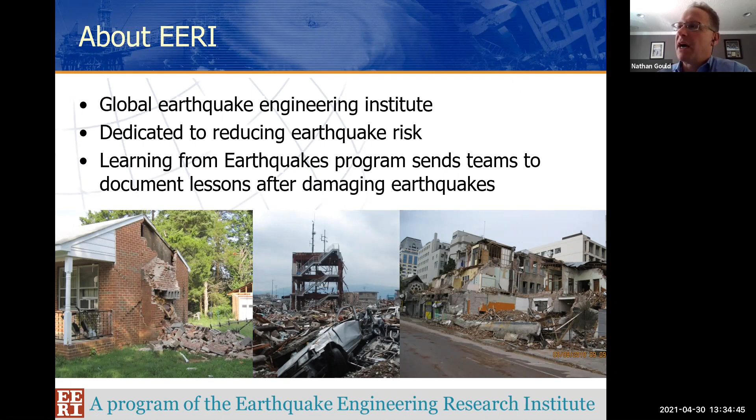So I'm going to talk about a bunch of different things, but the first part is, of course, you get to hear a little bit about EERI. Most of you obviously know a lot about EERI, so I'm not going to spend a ton of time explaining what it does, but I will tell you why I really enjoy EERI. You can see some of these things: the Freeman Family Visiting Professional, the competitions, the travel grants, Learning from Earthquakes is an excellent program. And then, of course, they give you this membership deal. So when you are a student, basically you get the first year of young professional membership free, and then you get the next 4 years reduced.

So all really wonderful. What I really like about EERI is that, coming from a structural background, it gives me the opportunity to engage and to learn from engineers that do other things than what I do. So I belong to a lot of structural organizations, SEI and some of these other organizations. So you hear other structural people talking all the time, or if you're at geotech, you hear other geotechs speaking all the time. But what's great about EERI is that it's this group of individuals with mixed backgrounds. So not only geotech and structural, but then you have the social scientists as well, which is tremendous.

And I've actually learned a ton from some of the social scientists that I've worked with and been around, even on the reconnaissance. So that's what I really, really like about this organization. It's really a one-of-a-kind organization, extremely worthwhile, and it's excellent for advancing your career as you move forward, especially if you're really focused on earthquake engineering.

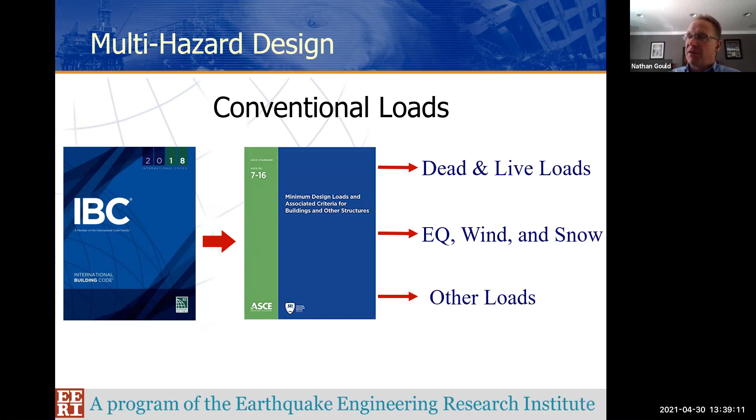And from this, we can get our conventional loads: dead and live, earthquake and wind, and some other loads. So most practicing structural engineers understand this. They have this down, hopefully. What about our unconventional loads? Like it's mentioned, we're being asked to design for these, or at least offer an opinion as to what the potential hazard is and what the implication is to the structure or to the facility. And so where do we go to find this type of information?

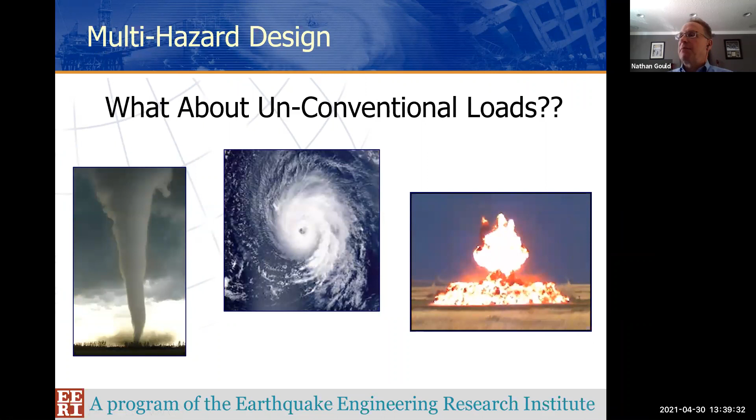So first, let's just talk about extreme wind. Extreme winds become more and more of an issue, not only in hurricanes. We see more hurricanes that make landfall with greater strength, but we also see a lot more tornadoes. Approximately 10 years ago, we had some really horrible tornadoes in the Midwest, through Missouri, Alabama, and some other locations that caused significant loss of life.

So there are these guidelines for extreme wind. One of them is the ICC 500 document, which is an excellent document. And that's nice because it's an ICC document, so it's the same family of documents as the building code, basically. The ICC produces the International Building Code. So there is that continuity.

FEMA has a great document, FEMA P-361, that offers a lot of excellent advice, resources, and guidance on the design of safe rooms for tornadoes and hurricanes. It's not strictly for safe rooms. A lot of the information could be applied elsewhere, but it is interesting to note how the requirements for safe rooms are making their way into the code for certain structures. Some of you may have seen that for schools.

So tornadoes, I know they're not so prevalent on the West Coast, but a large swath of the US is exposed, and we use what we call the Enhanced Fujita scale. A lot of people still refer to it as the Fujita scale, but it's been quite a few years since the National Weather Service changed it and made the Enhanced Fujita scale. And you can see the types of damage.

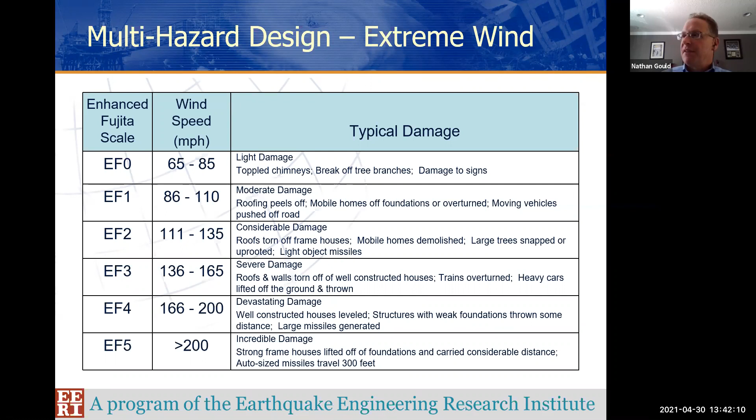On the hurricane side, this is mostly the East Coast and the Gulf region, hopefully people have seen the Saffir-Simpson scale. It's been around for quite a while. Again, it's different than the tornadic scale in many respects, but one thing is that we know the hurricane's coming, right? We can see it. The National Weather Service gets out there in their airplanes, and so they can measure the wind speed.

So the wind speed is a fairly accurate measurement. The storm surge that's associated with them, I won't say it's not accurate, but I would take it with a grain of salt, plus or minus, if you will. So these are the things to understand, Saffir-Simpson, the EF scale. Just as clients ask about designing for extreme wind, in addition to perhaps seismic or other hazards, these are types of things that you have to have in mind.

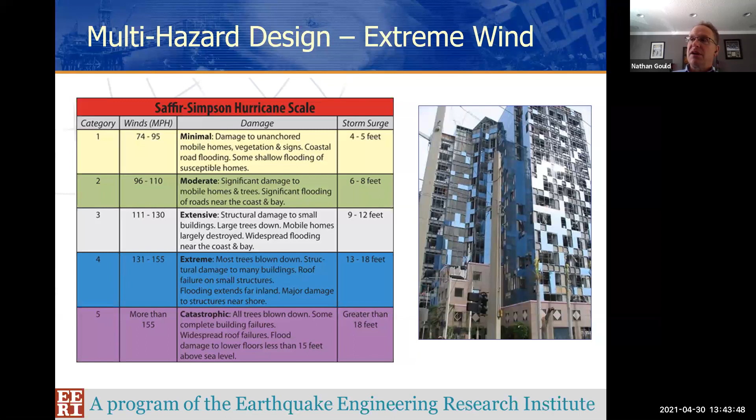I know when I started out in the West Coast practicing, it really wasn't something on my mind, but now people tend to practice all over the United States or all over the world, in fact. So it's something to be aware of and to understand how to apply it.

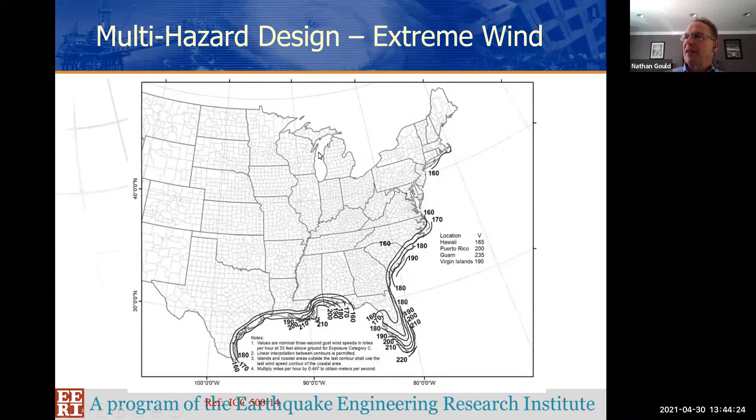Typically, these are tested items, what we test for both a vertical and horizontal surface. So it's kind of an interesting idea. So this is a 15-pound piece of 2x4. Typically, it's a facade. It could be including the window and the remaining facade of the structure. We would want the facade to basically be able to withstand this type of projectile.

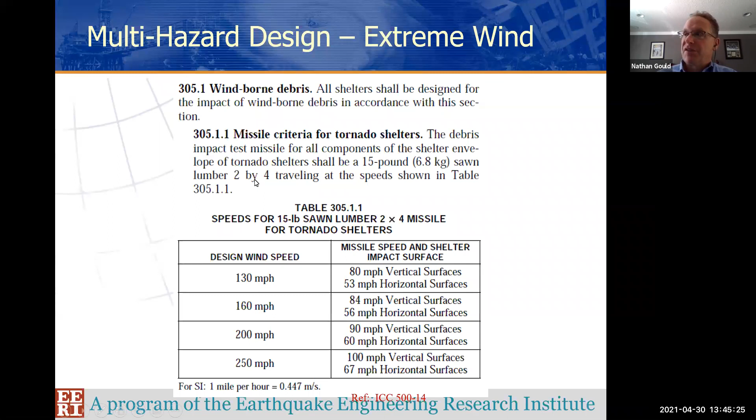So to give you an idea of what that might look like, I'm not going to play all this, but I don't know if you've ever seen these tests. They're pretty cool. I know some researchers that do this. They really love these little cannons. So it's a 15-pound 2x4.

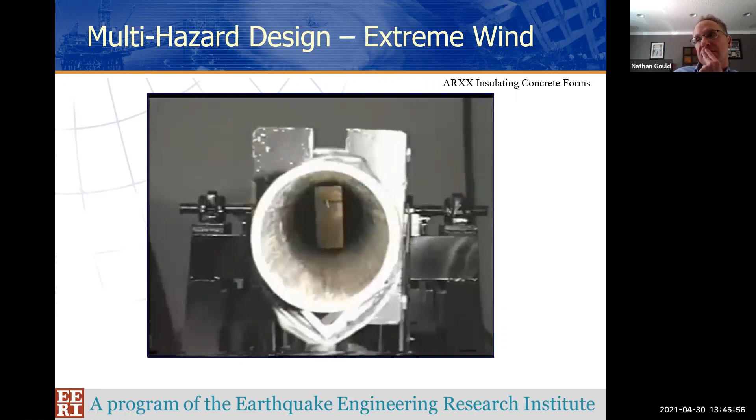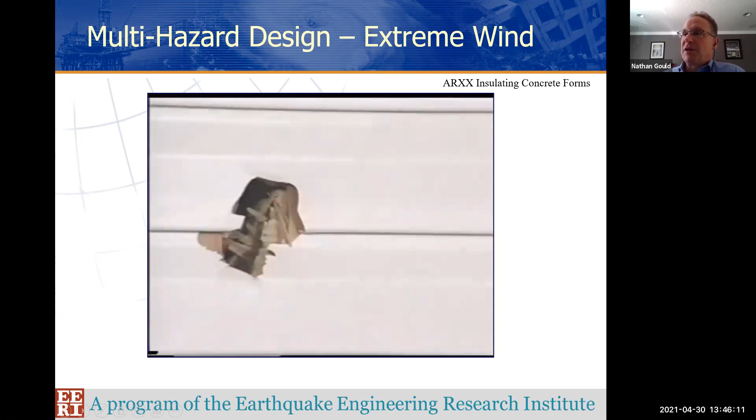So we'll see here, the first one is wood. Okay, so it's wood and siding, not a huge surprise, but what I find interesting is this test, right? So this is a brick facade. So this is somebody's home or somebody's business or somebody's office, basically a brick facade being impacted by a 2x4 traveling at speed. So interesting idea.

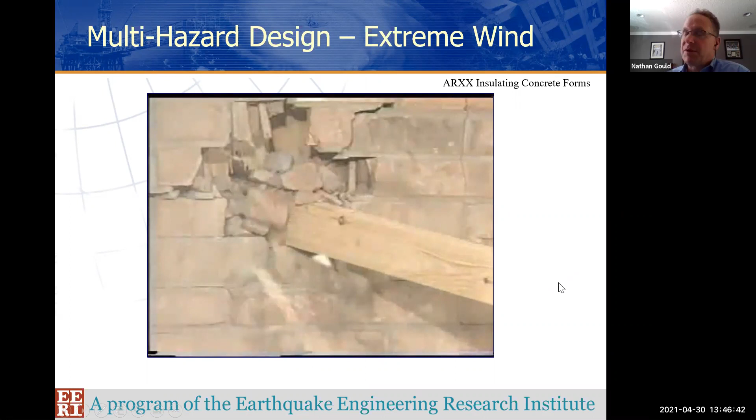It's something that I had never really given a lot of thought to when I first started doing extreme wind design, but when you have to design for that, finding a facade that will meet that requirement can be challenging.

Okay, so a couple of the other hazards. Blast, again, there's what we would typically call the terrorism type risk. But a lot of it is also petrochem, it's industrial. So every year when you see the news, there's several explosions every year. And it's been going on for a while. It's actually been getting better. There's a lot of government agencies that have been focused on trying to reduce and to learn from past experiences. But it's something that we still worry about, and in often cases we design for.

So in anti-terrorism force protection or blast design, the very first thing we focus on is standoff. So for those of you that maybe have looked at some of the dynamics, you know that the pressure and impulse produced by a blast is a function of the distance to the third. So we always say distance is our friend. So the more distance we can get, the more standoff we can get, the better or the safer we feel.

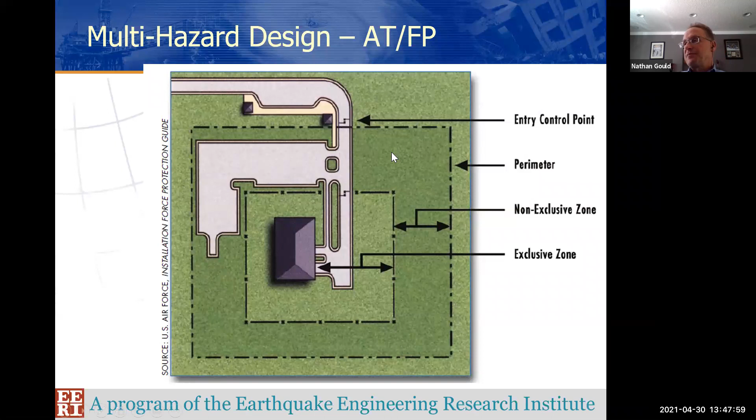If you are asked to do some blast work, or at least to integrate blast into your design, there's a couple of publications that are basically standards, or in the GSA's case, it's more of a guidance document for GSA. ASCE has a great blast standard, blast protection of buildings. And then the GSA, again, is progressive collapse. The DoD has a similar type progressive collapse guidance as well. So this is the Unified Facilities Criteria.

So for those of you not familiar, a lot of the information that's generated here in the US that focuses on ATFP and blast comes out of the defense industry. And the Unified Facilities Criteria is a great resource, and it is open, so it's public knowledge. Most of it is. There's some that is kept a little bit more tightly held, but it's an excellent resource. And then the book on the right, I would highly recommend.

In fact, for our staff, if we have a design and they have never been exposed to blast design, it's probably one of the first publications that I give to them, in that it really is an easy to use, easy to understand primer, if you will, on blast resistant design. So even though it says petrochem facilities, it would apply to other types of threats as well. So it's an excellent primer for those of you that may be looking at that type of work, or sometime in the future may be asked to work on a project that has that type of design.

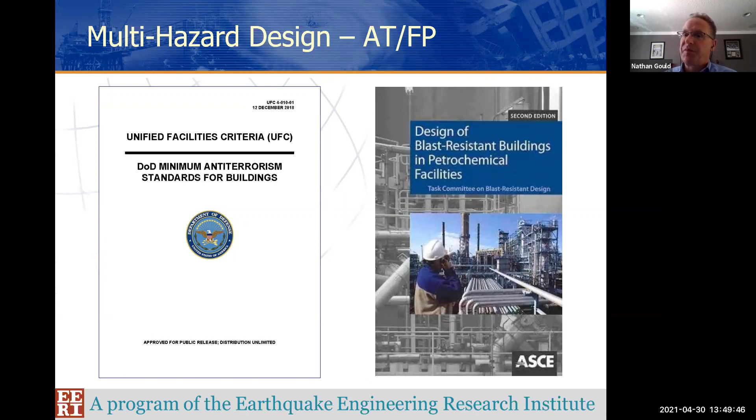So what is a blast? I found out earlier that most of you, if not all, are graduate students, so most have probably had dynamics, so this should look real familiar. Basically, it's this pressure disturbance caused by sudden release of energy. And again, people tend to talk about high explosives because that's what's in the news, or that's what's on people's minds. But we see a lot of these vapor cloud explosion or pressure vessel burst type of scenarios, especially in the industrial and the petrochem.

And so, with the blast, of course, we get this very, very quick duration, in milliseconds, right? And typically we have a positive phase and then we have a negative phase, which is different than most types of loads that we have. So even earthquake, which is a dynamic load, is so different in that the blast happens so quickly that the load is over and then the structure is responding. And so it's a different arena, and it takes a little bit getting used to.

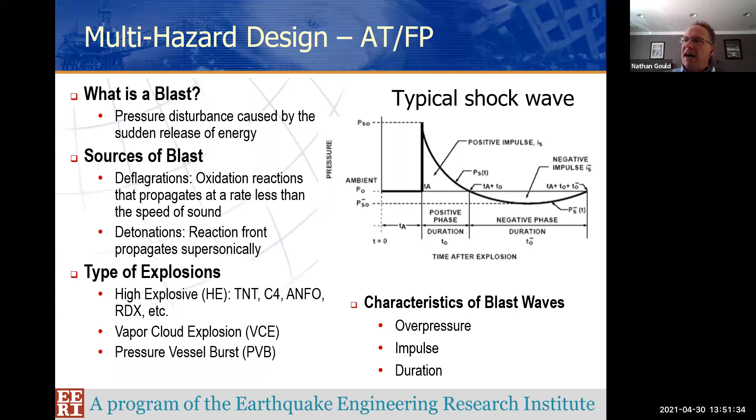And what you'll find, if you do get into that work, is that explaining that even to other structural engineers, and being able to integrate that into a design, can be really challenging, because sometimes the language is quite different. So for instance, if you have 5 PSI of blast load, some people just want to multiply that by 144 and apply that to the building as basically a static load, which is way overkill and would result in a tremendously over-designed structure. So things like that are one of the issues that you'll face.

So it used to be, in order to understand blast, get the characteristics, and do design and verification, we had to do a lot of free field testing, which is expensive, can be dangerous, and there's other issues with that. Now we also have another approach. We have this element on the bottom that I'll talk about in just a second. So we see some of the single degree of freedom. That's our classic go-to standby SDOF system. We use a lot of multi-degree of freedom software and systems as well. And there's some very high-tech computational fluid dynamics programs now that are just excellent, as well as the finite element. Typically, this is FEA on the right.

The bottom left, that's what we call a shock tube. And that's kind of a newer type of test facility, if you will. It's been around for a while. This one is actually something that we own. What this does is basically allows you to put a window or a door or some other type of element here at the wide end. You pressurize it and then you break a diaphragm, and as the pressure is released, it will impact your element with a pressure that's somewhat similar to an actual blast pressure, but there's no explosive.

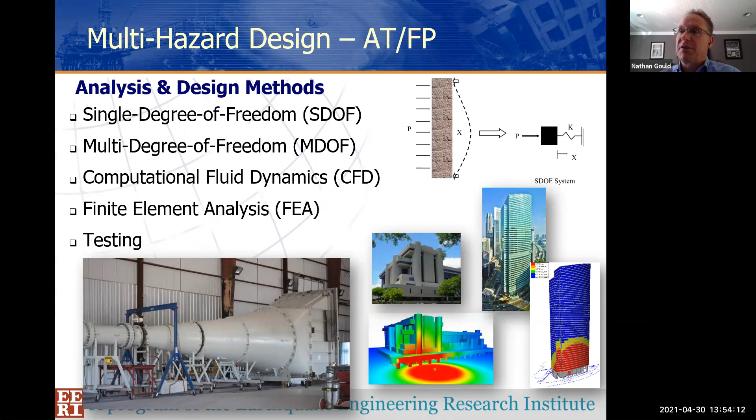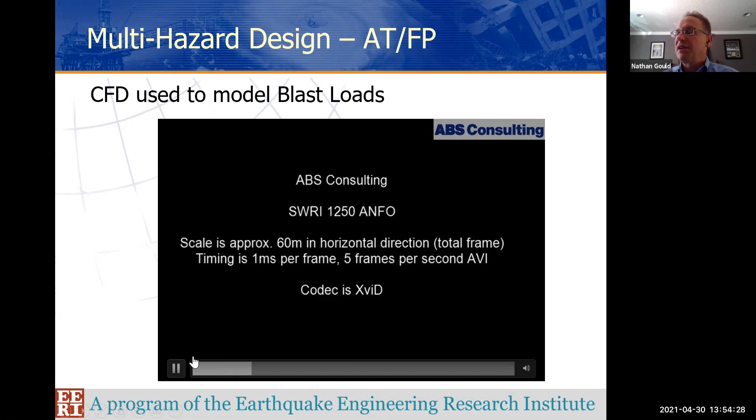You know, you're never quite guaranteed of what you're going to get. There was a lot of discussion about CFD when it first came out, how well it would simulate the blast loading. And so this is just a comparison of the CFD and the blast loading. What we can see is that on the left is the actual loading, and on the right is a CFD model. And so we can approximate the blast loading pretty well using CFD. So it's a nice thought. It's nice to have, because it's really helpful to have that alternative from an analysis standpoint.

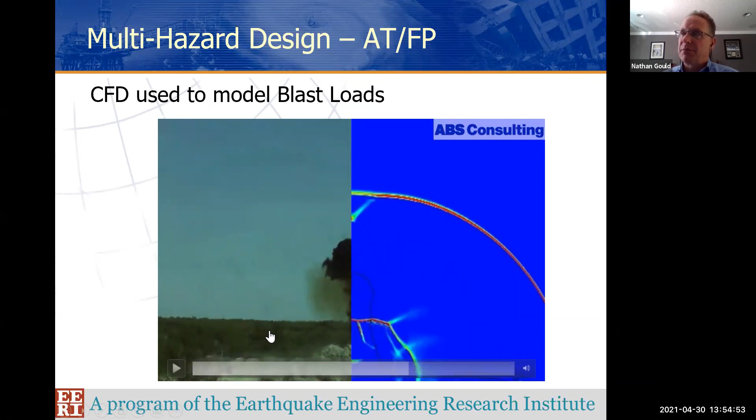So progressive collapse, it was not born, but it became hugely important to the US and to others really after Oklahoma City. For those of you maybe a little bit younger, this was back in April of '95. Most of the people were actually injured due to the flying glass and debris. But one of the things that came out of this tragedy was the recognition that some buildings are prone to progressive collapse, where basically you have an element or elements that when they're removed, like a transfer girder, for instance, that causes disproportionate collapse throughout the structure. And this became widely recognized and understood as being an issue. And so now certain buildings for certain clients are designed specifically to resist progressive collapse.

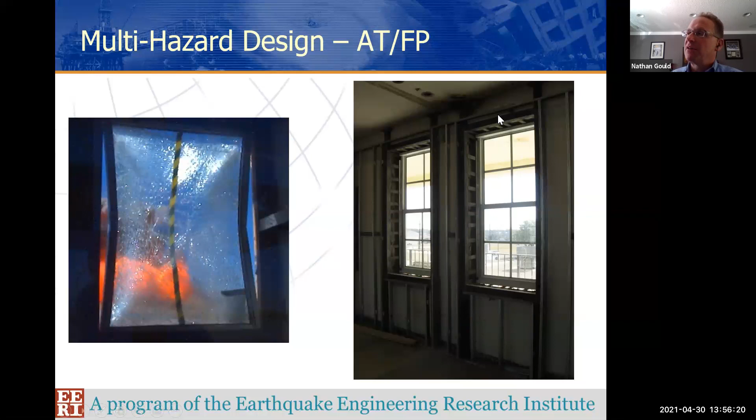As I mentioned, one of the biggest hazards coming out of that tragedy was flying glass and the debris produced by the flying glass. On the left, we see a witness panel or a test panel. On the right, you can see some glass that's been strengthened, where not only the glazing and the frame are strengthened to resist the blast loads, but then those loads have to go somewhere. So you wind up with very stout jambs and sills and heads around the window.

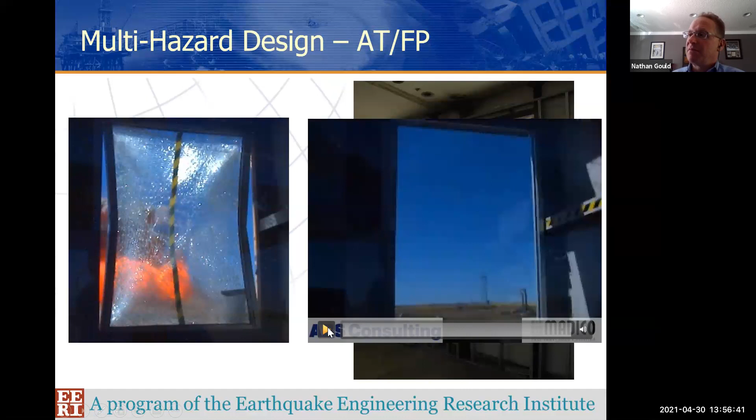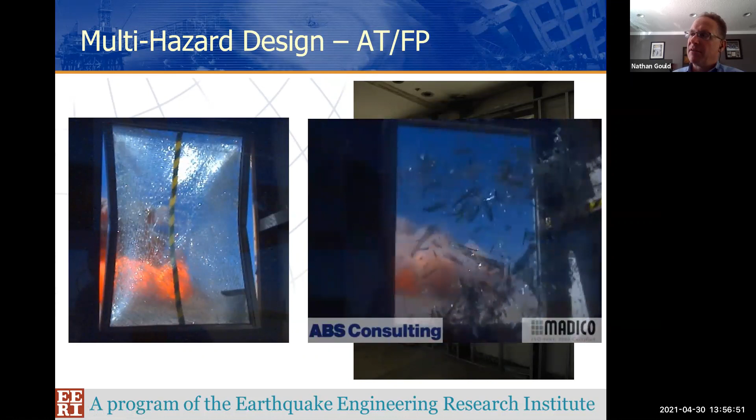So just to give you an idea of what this looks like from a test standpoint. If you are inside the structure and the blast is outside, you'll basically see what happens. First, this is a pane of glass that is not laminated or strengthened against blast loads. So here comes the wave, and you can see all the shards. That's one of the issues that we're highly concerned about when we start designing in this environment.

Okay, so that was a quick tour of the other loads, the multi-hazard and the blast, the wind. But of course, this is EERI, so we're all about seismic. So I wanted to talk a little bit about the seismic and how we integrate that in. For seismic, of course, we have the new buildings with the IBC, then referencing ASCE 7, and of course performance-based design, ASCE 41, extremely popular in certain circles. And I have that little arrow because there's always this discussion about if you design a new building per code and then you check it per ASCE 41, will it check out? There's been a lot of discussion about that. I find that interesting, if not amusing sometimes, but I think that could be an entirely separate topic.

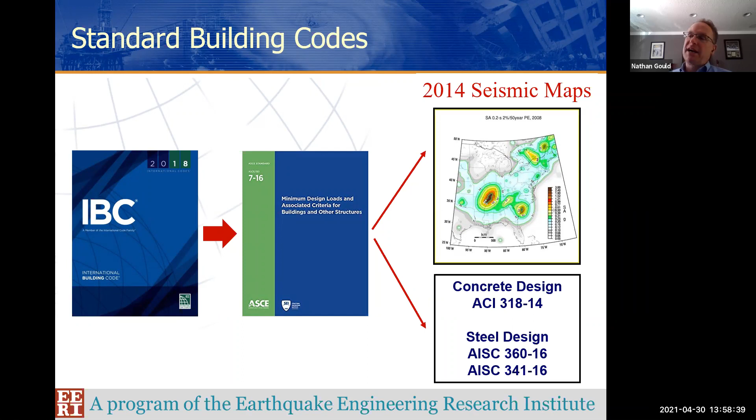So again, standard codes, most of us are familiar with those. We have the IBC and then it references ASCE 7-16. From that, we're told where to go find our seismic maps, the seismicity, and then the materials, the different disciplines are also referenced. So there's a lot of referencing going on. For students especially, and even our younger engineers, it can get confusing which code to use and what is the correct reference. Sometimes you do run across instances where people are using seismic maps that are either too old or too current, if you will, that are not correct based on which ASCE 7 is being referenced. So we do need to be careful with that.

So again, building codes, we think of these as a minimum set of design standards. I would say most practicing structural and other engineers understand this to some degree. A lot of other disciplines as part of the consulting team, probably not so much. So it's important that we be able to articulate this clearly and make sure that everybody understands what we're talking about. Again, it's about life safety, and we anticipate the structural and non-structural damage. As some of you have seen, this can be a foreign concept for some folks, and a lot of owners and even architects that you work with are not aware that this is something that can result from a well-designed code building.

So again, no financial consideration. So if the building is a complete economic loss after an earthquake, but everybody gets out safely, the structural engineer may be patting themselves on the back saying, hey, look, we designed per code. We did a great job. Everything performed well. We had all this plastic deformation, a lot of energy absorbed, but hey, everybody got out. We did a great job.

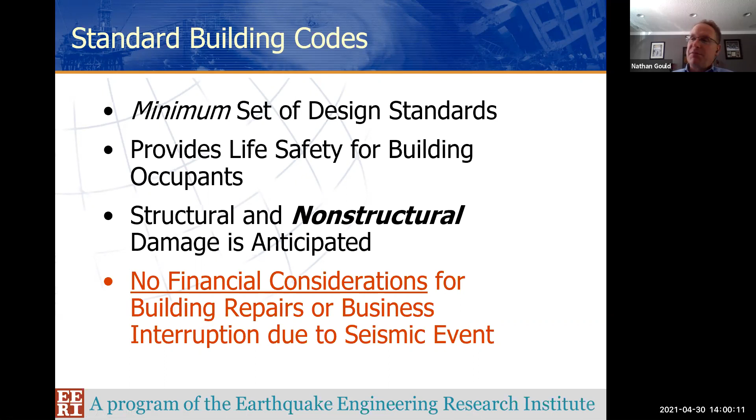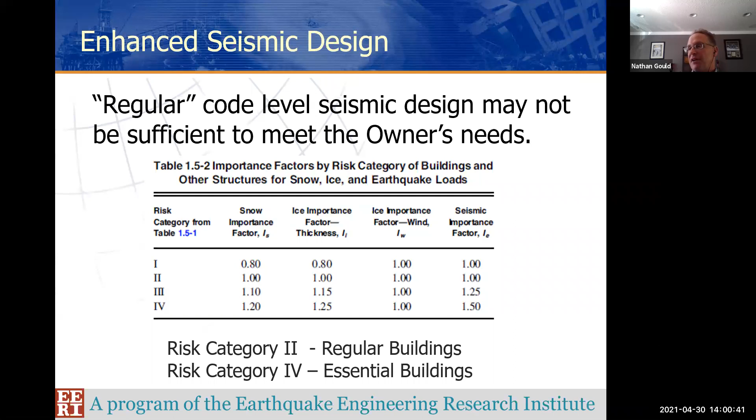And then the owner is saying, well, hey, but my building's a loss. So there is this issue. In the code, we can talk about doing a little bit better. This would be like an IBC ASCE 7. Of course, ASCE 41 is slightly different, but from a building code standpoint, we can bring this out and have a little chat about these importance factors. But typically this doesn't really come up unless you're actually looking at a hospital or a fire station, or perhaps a school or a large assembly facility.

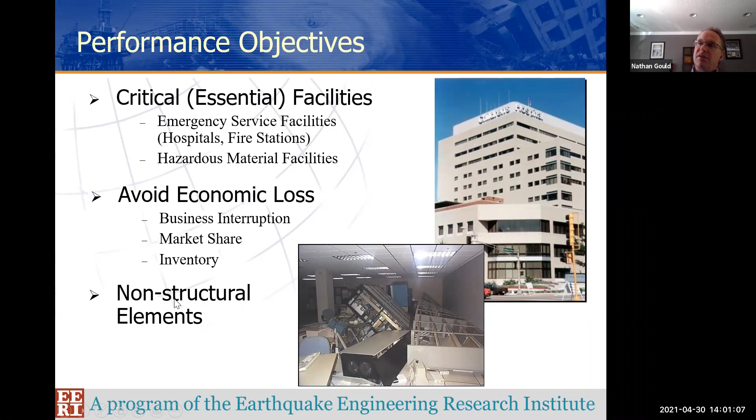So we have critical facilities. Most of us are aware of that. A huge hospital program in California, of course, and elsewhere. But outside the hospitals and maybe some other special structures, we don't tend to think of critical design. And again, how do we avoid economic loss? This is really important to many, many owners. And they may not articulate it well.

And sometimes you have to talk to the right part of the ownership. So for instance, if you're doing a very large facility, you may be talking to their construction management folks or some type of contracting arm that they may have. And it's really the risk manager that is really focused on this business interruption and the market share. So all of that is key. But again, you have to talk to the right folks and have a clear message.

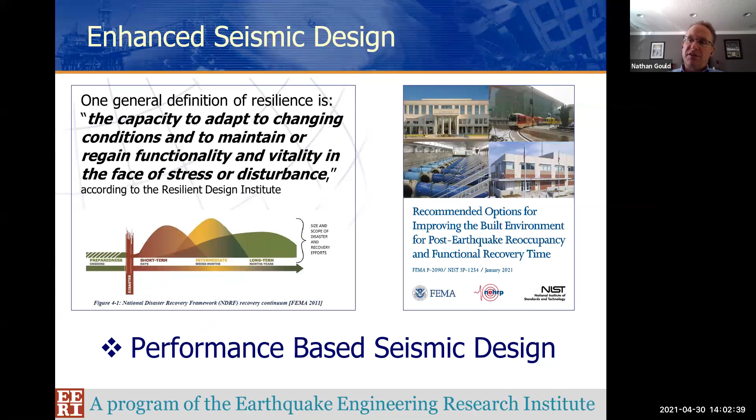And so I tend to think, and I think a lot of folks do, that earthquake engineers are typically the leaders in performance-based design. I didn't say seismic, I just said performance-based design. So when it comes down to designing structures to perform at a high level for other hazards, who better to get that message across and to guide the team than an engineer that really understands the history, that history being performance-based seismic design.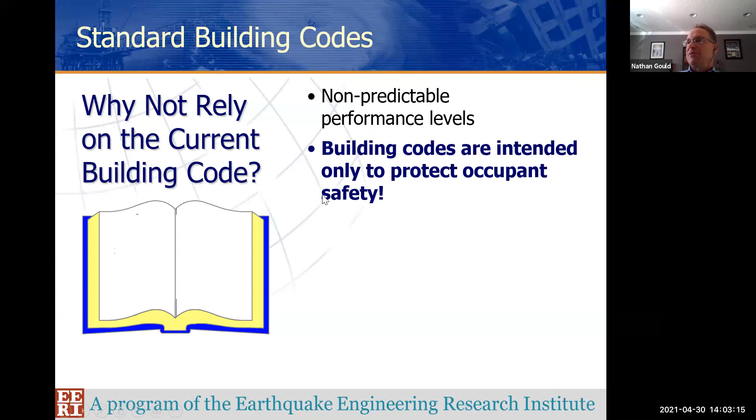So some older slides that have been around for a while, but I find helpful sometimes: why don't we rely on the code? We have this discussion quite often, not only internally, but a lot externally with our team and different owners. And sometimes it's a long discussion, and you have to respect the owner or the leader of the team; it's typically them footing the bill. So you can guide them to the idea and help them understand what it means and what it doesn't mean. But at the end of the day, it does become their choice.

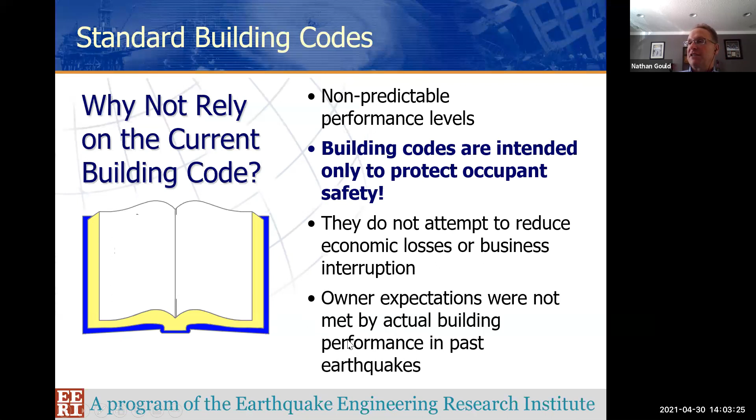And you want to focus on their expectations, right? And appeal to their economic issues, and basically help them focus on what things could be like after an event. So again, to protect their investment, we don't typically want to rely on the building code as the base design if we can avoid it, and make this a team effort.

So if it's just the seismic engineer pushing for this, it looks a little self-serving, right? Because this means that we're going to do more work probably. And B, it's typically going to fall on deaf ears because nobody else really wants to hear about it after the fact. So you have to get everybody together early. And I mean early, like when they're actually still thinking about how they're going to budget for this new project. Once the budget is set for a project and things are moving forward, it's almost too late, because then enhanced seismic or enhanced wind or whatever it may be becomes a burden to the project and to the ownership.

So currently, a lot of us are using ASCE 41-17. It is an excellent resource for seismic. We actually also use it for other hazards as well in certain fashions. One of the things we do is we use it to help delineate different performance levels relative to hazard or return periods, and talk about how to control the building performance, or at least understand building performance and the expectations.

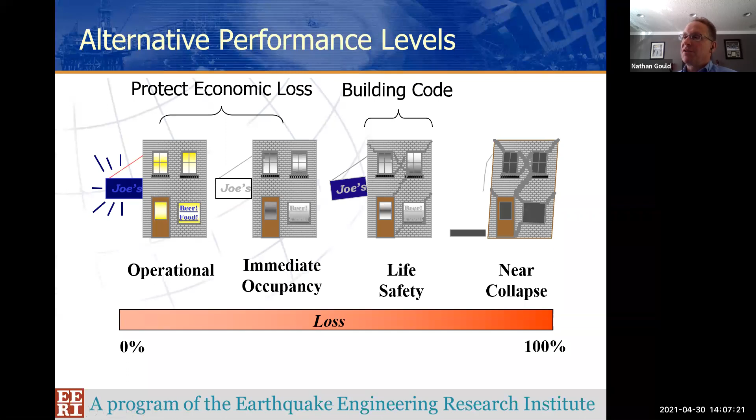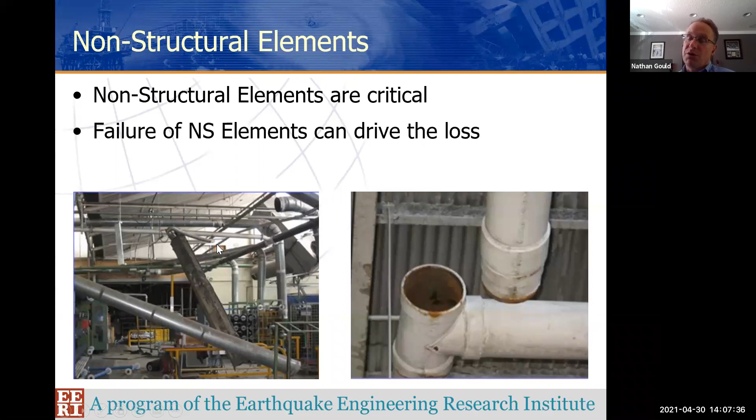Speaking of the non-structural, it's one of the issues that we see over and over again in different earthquakes that are critical, that often lead to a building not being functional after an earthquake or an extreme wind event. And it's one of those elements that are often forgotten about or not really focused on during a design.

So non-structural has become more of a known quantity, if you will, but a lot of times you'll get to ends of jobs and people will be looking to see who dropped the ball in terms of non-structural, not getting braced, not getting anchored, not getting laterally restrained. So one of the things that we try to do, as a structural or seismic team member, is to make sure the team understands that this is something that has to be taken care of.

So, is it a structural engineering issue? Is it a mechanical engineering issue, if it's ducting, or is it an electrical issue, if it's MCC units? So, when you're a team, you have to make sure the team takes care of it. And so that just needs to be something that's focused on during the design process.

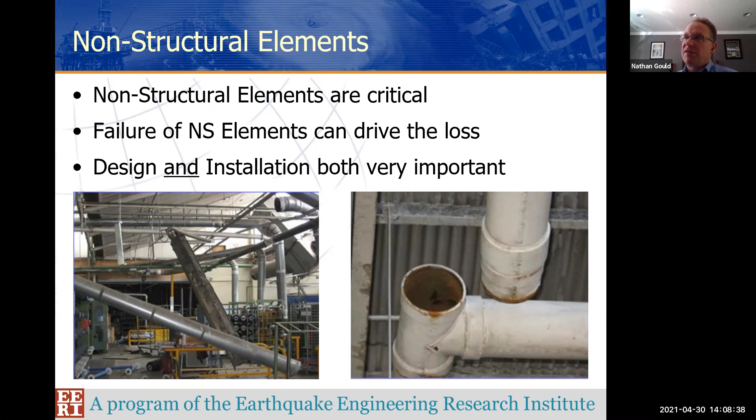So all is not lost, or all is not bad news. We have a lot of great advanced technologies, and I'm sure many of you have seen them. One of them that's really popular these days are these buckling restrained brace frames. There's several others as well.

So, I think the future is really bright as far as tools and options for using enhanced seismic, and installing these types of advanced technologies, not only in new structures, but in some cases, existing structures as well. So I think there's a lot of bright ideas out there, and a lot of good ideas. So I think there's a lot to look forward to.

We always get asked about cost. That's one thing that always comes up. So what does it cost to upgrade to better seismic performance? And it's really tough to pin it down because a lot of it depends on the overall project, right?

If it's a small project where the structural work is a significant piece of the whole project, then it may be more percentage-wise. If it's a huge project with all kinds of MEP and different types of equipment, mechanical, whatever, the structure could be relatively small from a cost perspective, and so the total cost could be pretty small. So we tend to focus in on these ranges.

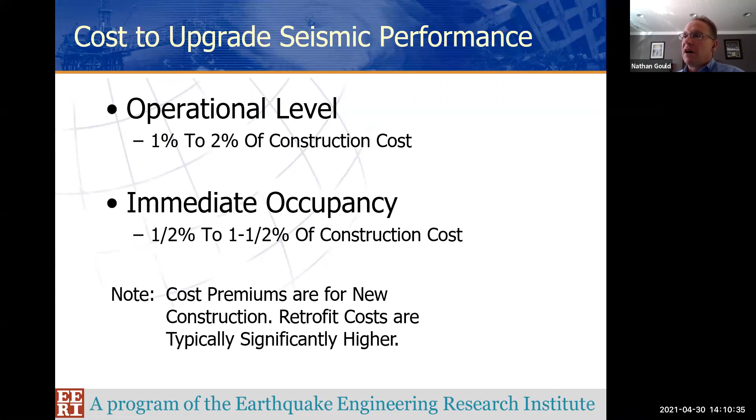But again, it really fluctuates. So you can see, these are very close. The difference being, again, is the lifelines and the non-structural. But this could be as high, I've seen it as high as 7 to 10%, for a smaller project where, again, it's a complicated structure, and the structure and then the bracing and the enhanced bracing or restraint of the equipment drove the cost up. So again, it's really a little bit all over the place.

Okay, so that was kind of a quick tour of some of the other hazards along with the seismic performance base. And the idea is to tie it together. So you have a bunch of different hazards. You have the potential at some sites to actually have multiple hazards at one time. So how do we pull it all together? The first thing we do is we keep the load cases separate. So we don't want to mix and match hazards.

It sounds really simple, but when people get busy, things get a little crazy. Things can get mixed up. So it's really important from a bookkeeping standpoint to really focus on the different loads, because there's different issues, different load factors, different phi factors, et cetera. So we have to keep everything nice and neat and nice and separate.

Be very clear about code versus ultimate design. So for instance, seismic, most wind, we're in a code design, whether it's ASCE 7 or 41. But when we go to the blast world, we might be in an ultimate design with no load factors and a phi of 1. So it's important to understand the type of design regime that we're working in and how to apply that.

And of course, owner education. That is a huge issue. Without the owner being educated and on board, things very rarely tend to go well. And same as the last bullet, this coordination with the disciplines. Whether it's this enhanced seismic or the other hazards, often some of the disciplines won't have been involved in that type of project before. So this could be totally new to them.

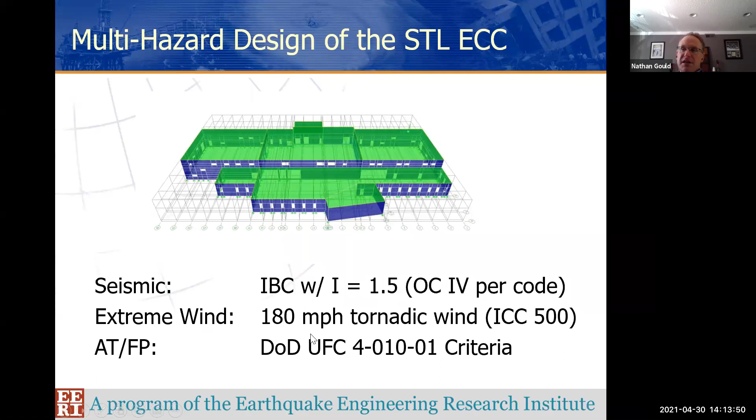So the extreme wind was interesting because almost 10 years ago exactly, there was a pretty large tornado that came through the area, damaged the airport, and actually damaged a lot of the structures and facilities near where this new 911 center was going. So they had asked, in light of that, as the design was progressing, how could they integrate tornado?

And we started having a conversation, and you say to them, well, how big do you want? And they say, well, how big does it come? What's the biggest? And you say, well, there's this EF5, which is like the Kansas Dorothy thing. And they're like, oh, that's great. And you're like, no, that's not so great, because it's hard when you get to the very extreme levels to find products and design elements that will actually work, from warranty issues and other things. So we actually settled on that 180 mile an hour as kind of a compromise.

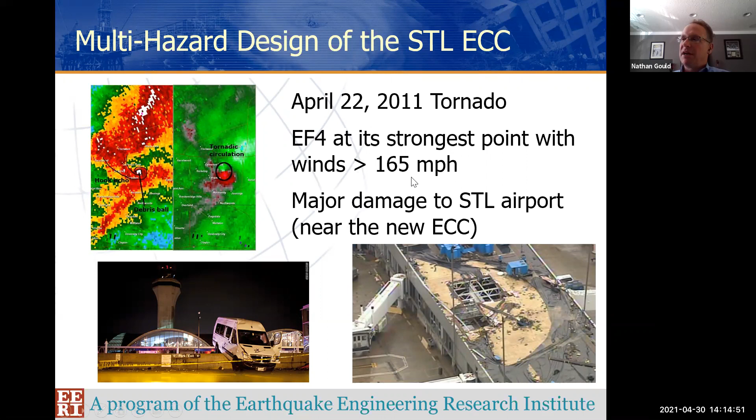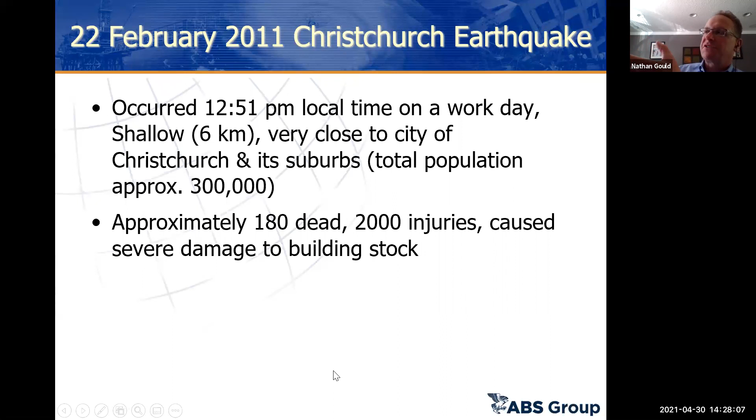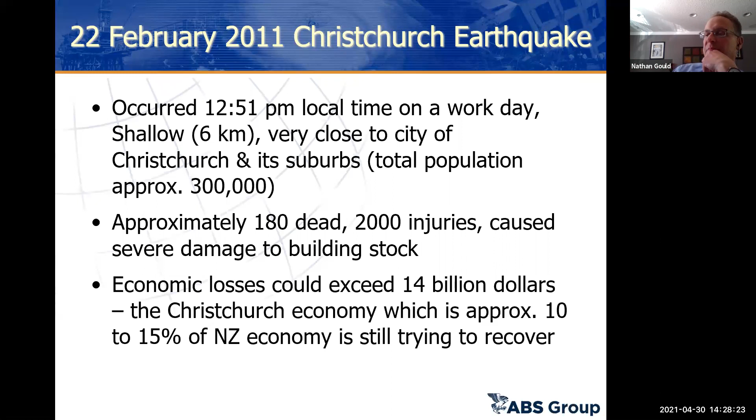So this won't be nearly as long. I was asked to talk a little bit about earthquake reconnaissance. I know a lot of folks, it's a fun topic. I'm not going to go through this whole presentation, I'll get bits and pieces. I was very fortunate to be part of the EERI team that was in Christchurch after that earthquake. It was a pretty big earthquake, and the last part, I won't say the most important, because the dead and injured are certainly important, but the impact to the New Zealand economy was major.

From a seismological standpoint, there's a fault that runs through New Zealand, the Alpine Fault. New Zealand has a North and South Island. Basically this earthquake happened in Christchurch off the main fault. So this was kind of like maybe a zone 2A or 2B in the old zone speak. They were waiting for the big earthquake in some of the other cities that were right on the fault. Christchurch had seismic design, but not nearly the same level as some of the other cities.

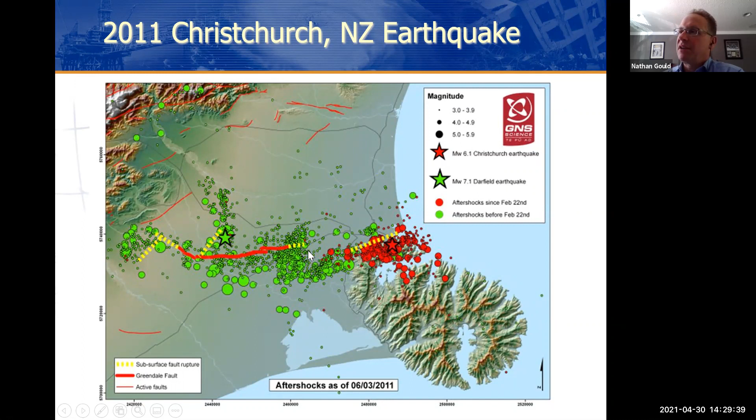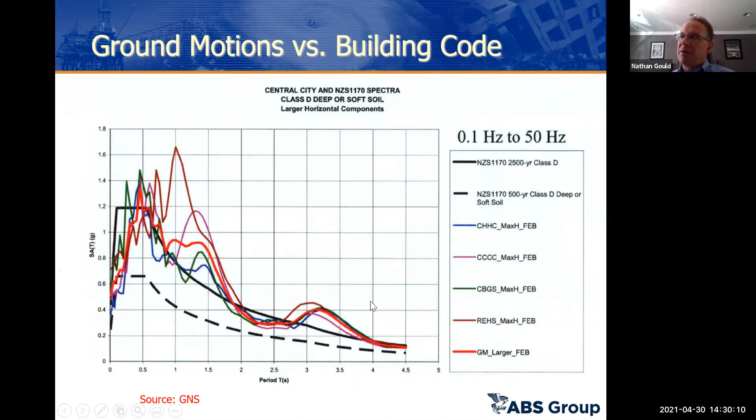I'm blowing through a lot of this quickly because of timing, but here's their design spectra, and here's some of their ground motion. It doesn't take a lot to figure out that they were well above their typical design spectra. And their retrofits were even more involved, because they had different retrofit levels depending on what the engineer had chosen.

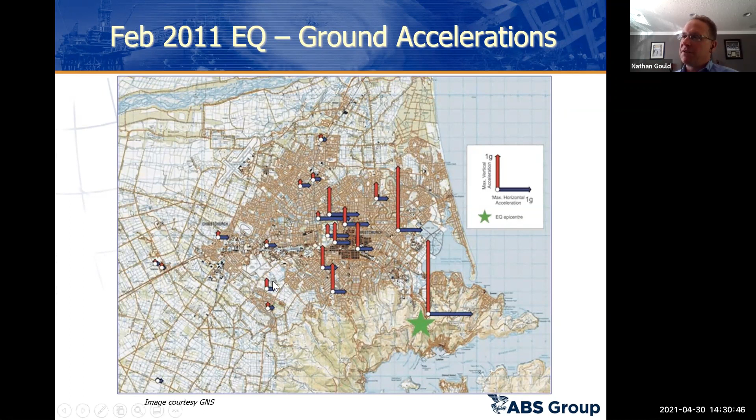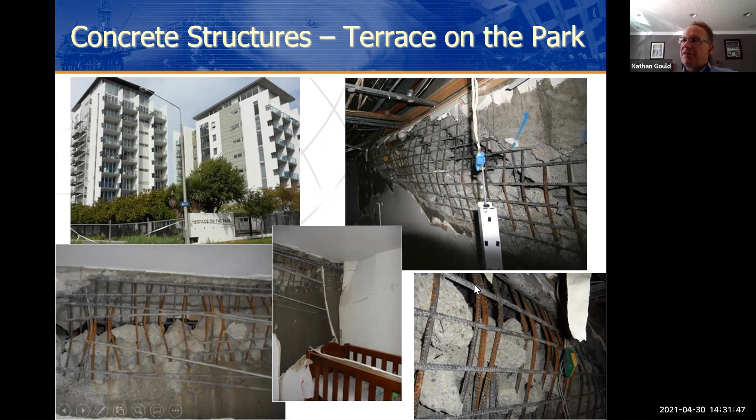So for those of you that may be familiar with New Zealand, they have some very, very famous concrete professors or concrete folks that come out of New Zealand, and pretty proud of the concrete design. So it was a little surprising to see the level of damage that we saw, some really poor ties and confinement. So somewhat not surprising when you see some of the design.

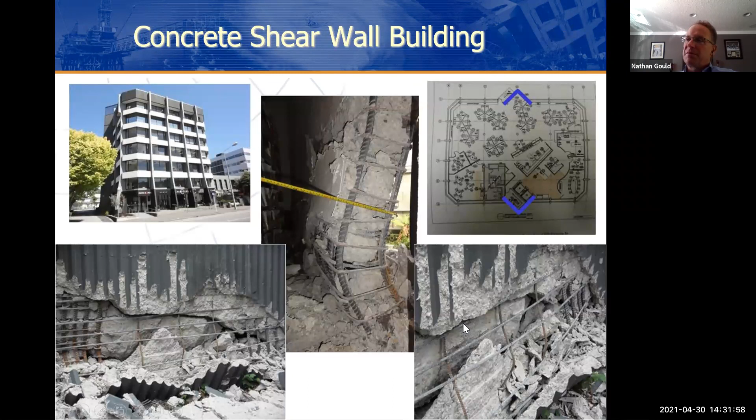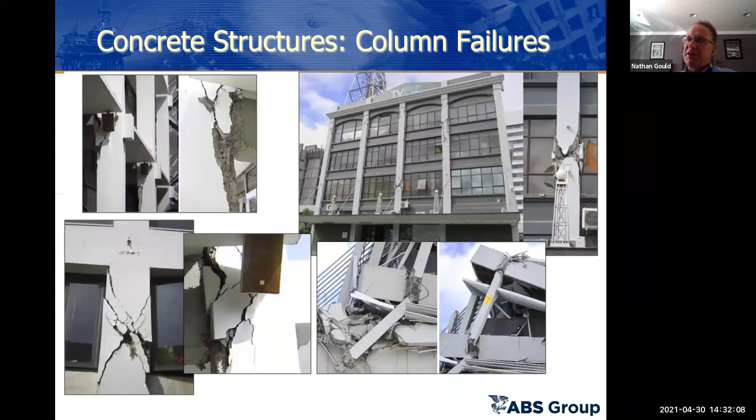Some really typical pier failures in the URM and a lot of short column failures. So, you know, nothing where we would be overly shocked. This was a little interesting. These were eccentric brace frames. So this is 10 years ago. Eccentric brace frames have been around for a while. I don't know if a lot of them had been through a bunch of earthquakes.

And of course, with eccentric brace frames, we expect some damage here in the link, remember, where basically we expect some plastic hinging to go on. But what we saw were these basically fractures right here that were taking off from this outside gusset. So definitely not a failure mode that should have been anticipated or should have occurred.

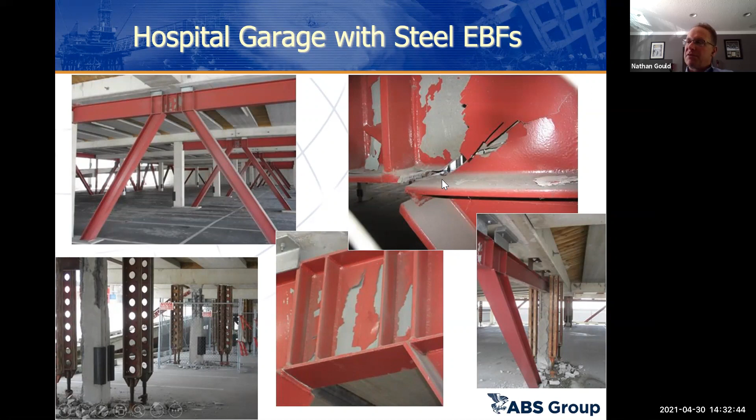You know, we saw these type of failures. These are regular geometry, masonry piers, 16 inches and ties at 16. So no great shock. One important lesson that I took home was these retrofitted URMs. So we've been retrofitting URMs. I've been doing it since I basically started working.

And one of the ways people had anchored into unreinforced masonry was what we call screen tube anchors, right? So these are tubes, kind of like mesh tubes. So you drill the hole in the masonry and you shove the tube in, and then you fill it with adhesive typically, and you put the anchor in. And it's basically this bulb of adhesive that restrains the anchor from pulling out.

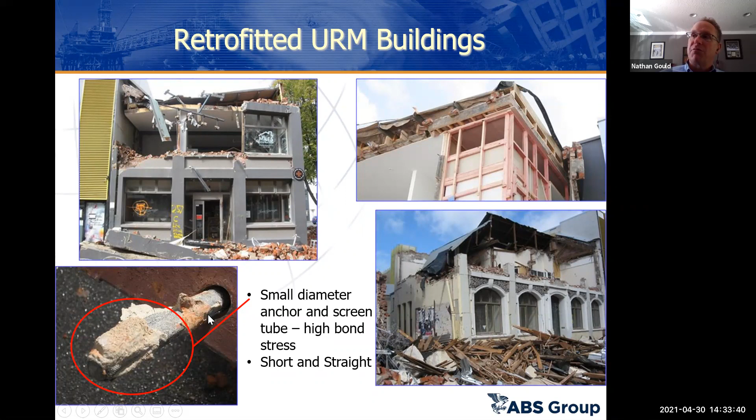And what we found was that it performed really poorly throughout the area. So these are all retrofits. These are all seismically retrofitted structures that failed. So the very first thing that I did when I came back was with my office, basically said, no more screen tube thing, we got to take another look.

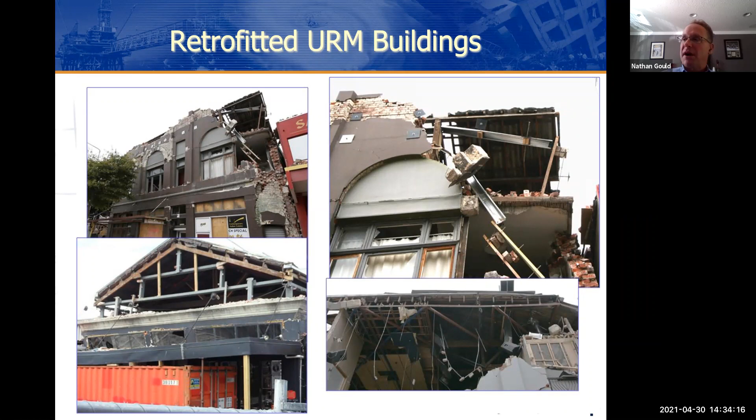And even if that meant cutting the face shell off a masonry block and filling it all up with grout and putting in a more traditional anchor, at least that way I would feel confident in the performance. So this was a huge surprise how poorly these retrofits performed.

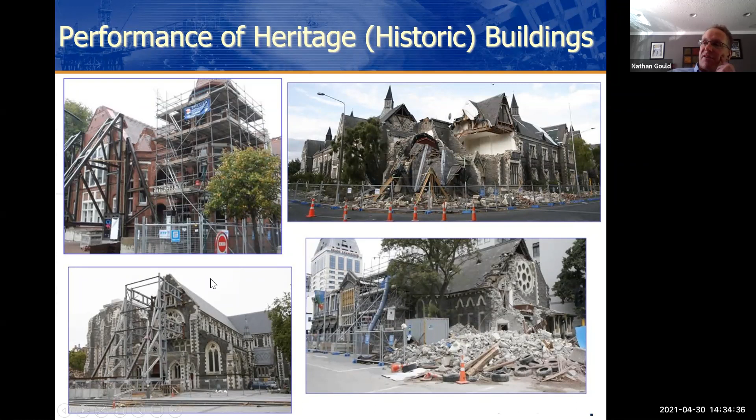Historic was a big issue. They call them heritage. We would call these historic. And there were huge fights about whether certain historic buildings could be demolished. And we'll probably see the same thing. So a lot of light industrial damage, and I won't spend a lot of time.

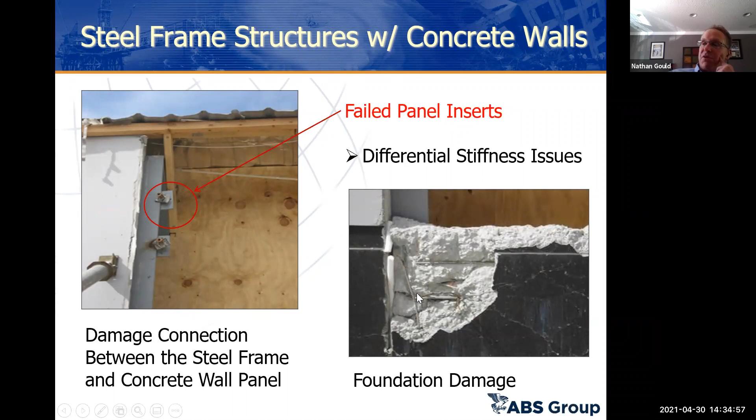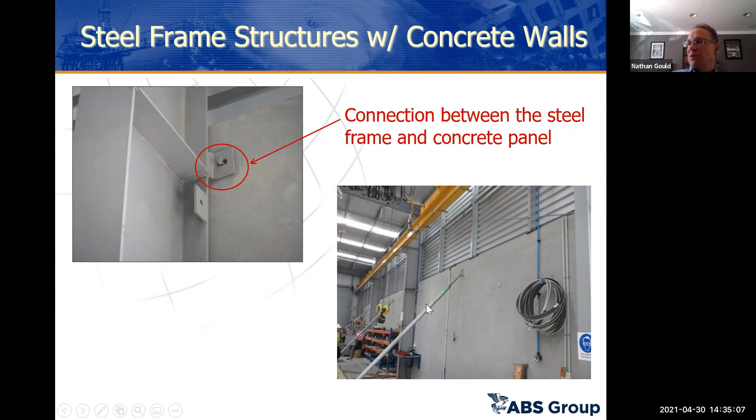Things that we see all the time, you see in California after every earthquake, tilt-ups or precasts where basically you have anchors that have failed and we lose a panel. Here you can see the anchor and the failure where basically it just pulled away from the foundation. And again, some more types of anchor failures, and they actually come back and have to shore in order to keep the building stable. And tons of non-structural damage everywhere.

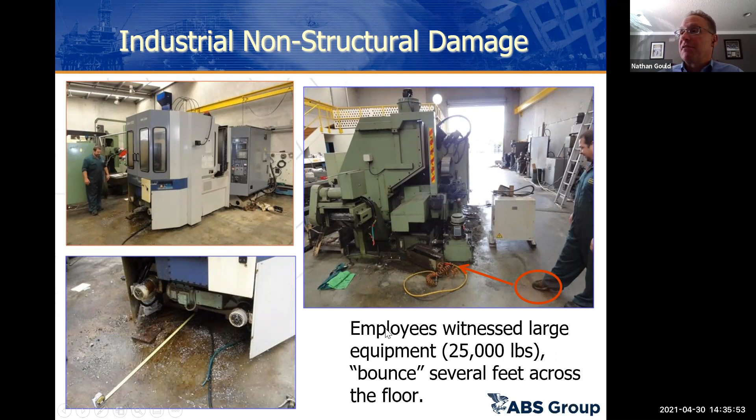And we're like, oh, did you run outside? Did you take cover? Did you hide? Oh, no, we watched it. And this is before everybody had camera phones. So I'm sure they would have been taking video if it happened today. But they were all really excited explaining what they witnessed. I'm sure it was exciting. But vertical acceleration was a huge takeaway.

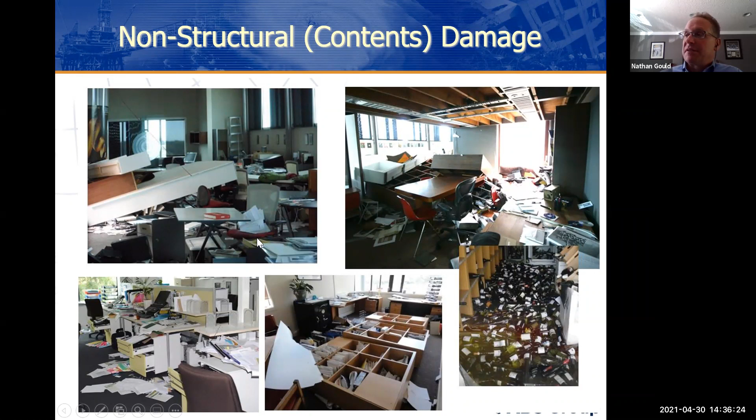Contents, again, not typically thought about or considered, but again, it can make getting out of these buildings really difficult. And if it's your life savings tied up in some type of storage or stock, it can be an issue.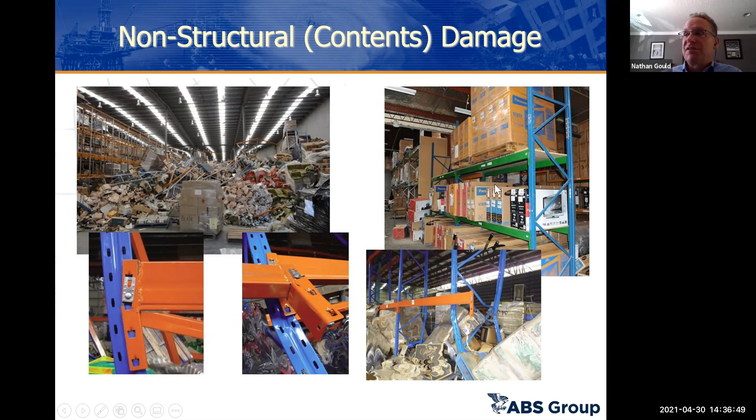Classic damage to palletized racks. We see this every earthquake. So, these racks are always a mystery, right? Because you have this little pseudo brace frame in the transverse direction, and you have this kind of a moment frame in the longitudinal direction, right? I mean, technically they design as a moment frame, but it's a pretty light moment frame, I guess, and so that was an issue.

Now we did see some well-designed non-structural. This is actually some telecom equipment that was well braced. It's interesting though, in this building they had some old masonry partitions, and the building did pretty well, but masonry partitions, as you would expect, had a lot of cracking and so forth. The building wasn't going to collapse.

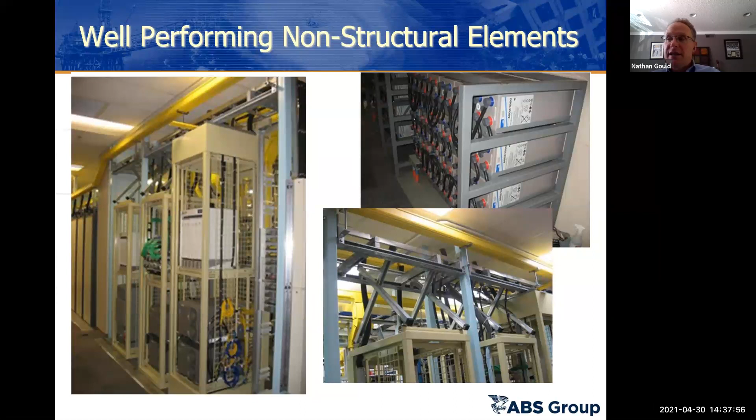There was no issue, but the workers who worked in this facility saw the cracks in the masonry partitions and said, we're scared. We think the building's going to collapse in the next big aftershock, so we're not coming to work. And this is before telecommuting. So the business was in a bad way. So it is important to understand that employee perception can mean a lot. And if the employees aren't comfortable, even if it's not a life safety issue, if they're not comfortable coming back to work, then they may not reoccupy the building.

So one of the things I wanted to really focus on was this case study to illustrate what non-structural means, or what kind of damage can happen to a facility or a business due to non-structural. So this is a carpet manufacturer. It's kind of a classic New Zealand facility in that they take wool and basically produce yarn, and significant damage. And the real issue is that they had to let 220, most of their workers, go after the earthquake, even though the structure had damage, there was no major collapse. They had these little funky brace frames, these little turnbuckles, but the structure was still standing.

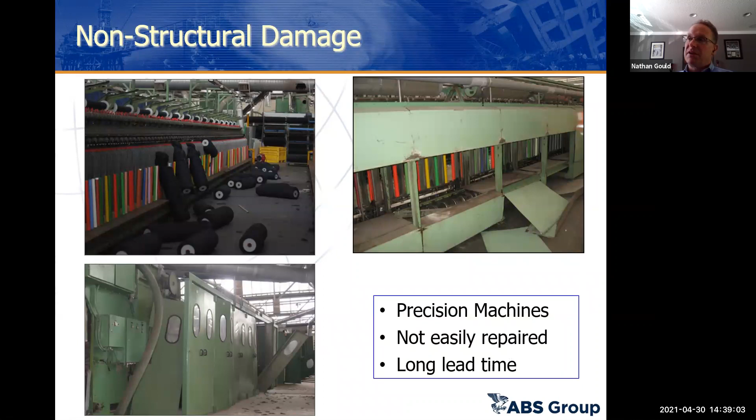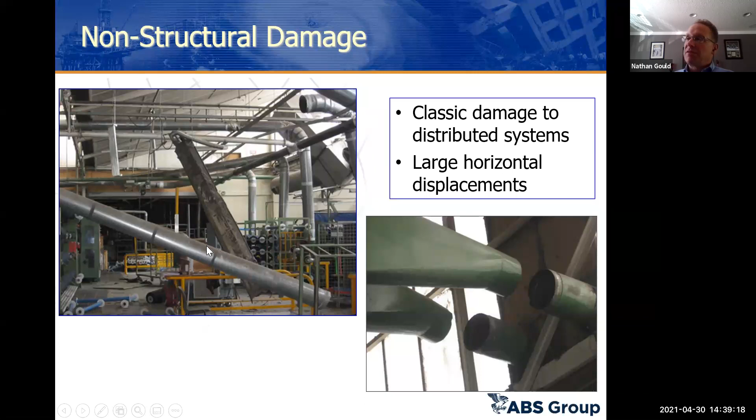It was non-structural, and they had a lot of precision machines. These machines were very highly calibrated, and the parts are very special, not easy to repair, very long lead time. And so these machines were damaged, and that basically put the folks out of work. We had really large displacements in some of the equipment, and also all this non-structural where I think a lot of this could have been repaired fairly quickly, but the machines themselves were the long lead item.

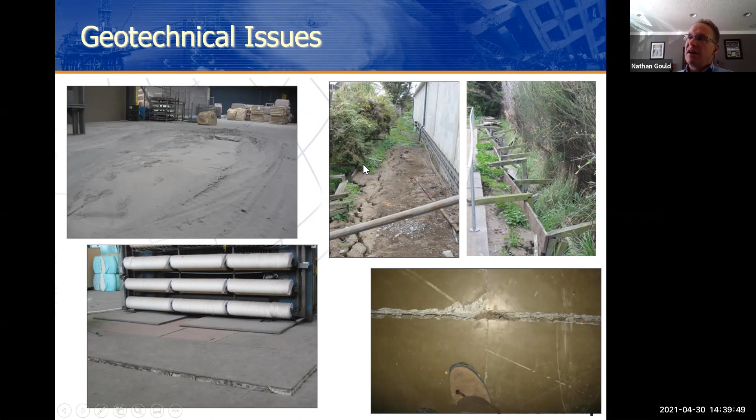We had a lot of collapsed masonry, and we had sand all over the place when you first walked in, and we realized that they had suffered significant liquefaction. So a lot of the machines were on special isolated pads, if you will, and a lot of those had basically either been popped up or pushed down or moved due to the liquefiable soil underneath. And then we also had the site issue as well.

So how am I doing for time?

The last issue I want to talk about, because I think it's really relevant to pretty much any earthquake, is inspection. When the EERI team arrived, the access to the city center was limited. And we also found that there were 70,000 buildings to be inspected. And they don't have a ton of engineers in New Zealand. So several of us volunteered to participate in their rapid assessment program, to help out for a couple of days. And I think that was extremely rewarding, at least from my perspective.

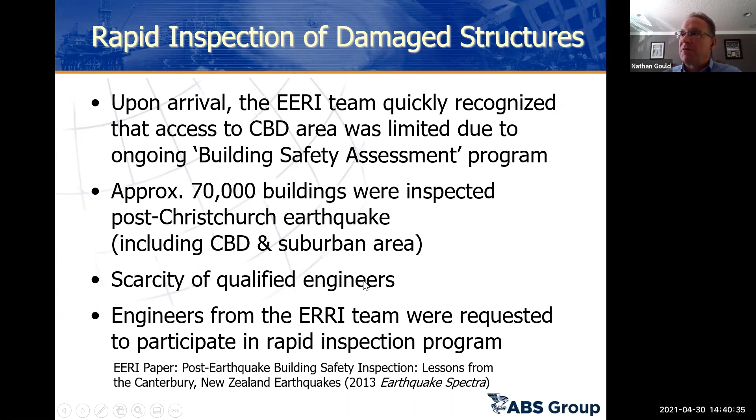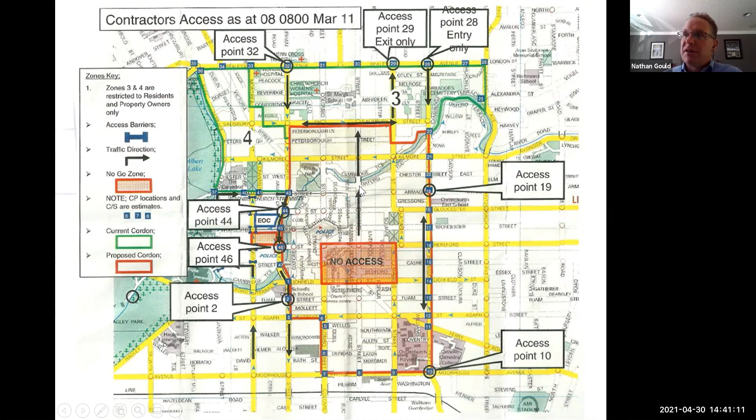So this is the Emergency Operations Center. It was pretty chaotic, but they did a great job trying to keep everything straight. I'm assuming we'll see much of the same when there's a large earthquake here in the States. They had a cordon, so they used mostly police, maybe some military. Honestly, I can't quite recall, but all the access was controlled. They basically did not want tourists wandering up and down, taking pictures or looking at the damage.

But the real takeaway was their use of the ATC-20 methodology, which is important. This is the current methodology. ATC, the Applied Technology Council, uses the ATC-20 methodology for post-disaster or post-earthquake inspection. So many of you may be familiar with the green, the yellow, and the red tags.

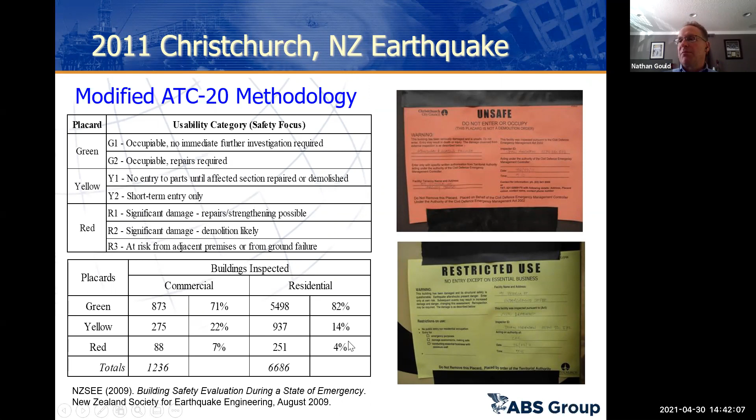And so they actually did a modification to that, which was really interesting. And they added some additional categories. And you can see here just the sheer number of buildings to be inspected. So it was quite a few. And they were all over the place, right? So one minute you're inspecting a five-six story concrete frame or concrete shear wall. The next minute you're at some kind of strip mall, and then you're at somebody's house.

So the house was really tough personally, because usually the commercial buildings were vacant, but the houses, usually the people were still there. So if you tag a house yellow or red, where red is no entry and yellow is conditional entry, you're basically telling them that they're going to have to vacate their house. So that was unexpected in terms of having that kind of interaction.

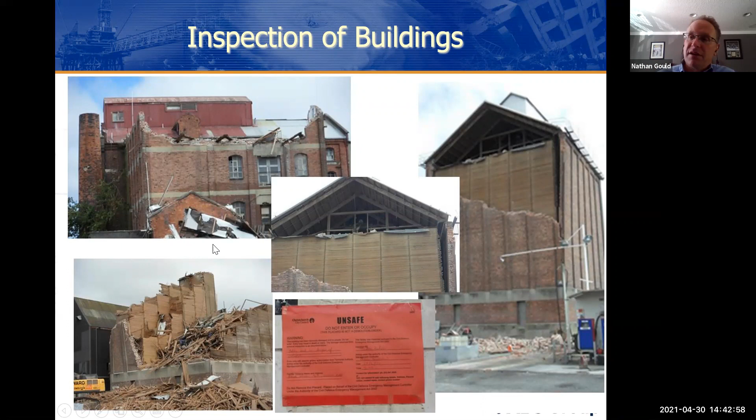And then, this is actually a historic structure, and there were a lot of protests going on about the idea of demolishing some of these, they call them heritage buildings. So that was a very quick 15-minute tour, but it's important because it's a moderate region. So it's more like a Sacramento, St. Louis, Memphis, maybe Charleston type area, moderate seismic design, and maybe not quite ready for a major earthquake.

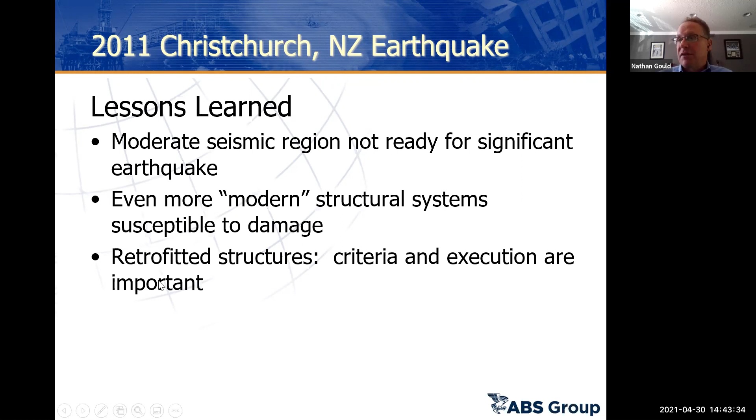The modern structural systems saw quite a bit of damage, so it was a big surprise. Really disappointed in the performance of the retrofits. A lot of important information out of that. And then the non-structural, I think that's a lesson we already knew, but saw it again. And then the post-earthquake evaluation.

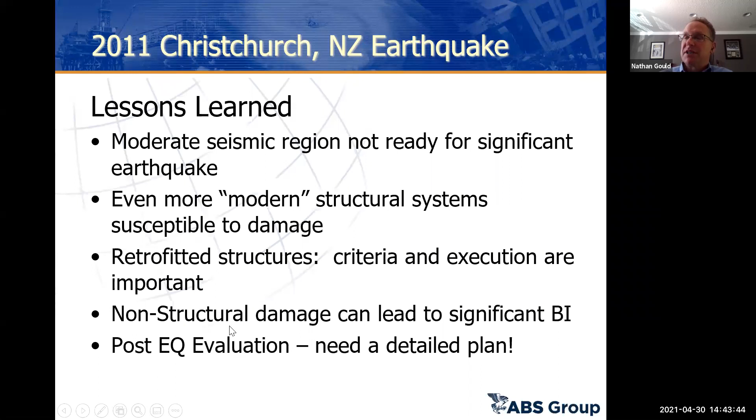So anyway, I know I had that 15 extra minutes, so hopefully I didn't run over. I'm happy to take questions on this as well, if any of you have any. I know a lot of you are actually meeting Nathan later, but if you have any questions specifically about the reconnaissance work, you can go ahead and ask them now.

I have a question. Sure. So thanks for this presentation. This was super interesting as well. And you may have mentioned it and I just missed it, but how did you end up on a team that went to New Zealand? So it's a good question. I was pretty active, or I am active, with EERI.

And after the event had happened, there were discussions about putting a team together, and they were taking some volunteers. My company at that time made it clear that I could have that time to go and be part of this team. So it was just an opportunity; they were soliciting volunteers really from members that they knew were interested in this type of work, that did this type of work, but they were also looking for a cross section, right? So not just structural, it was structural, geotechnical, and also social science.